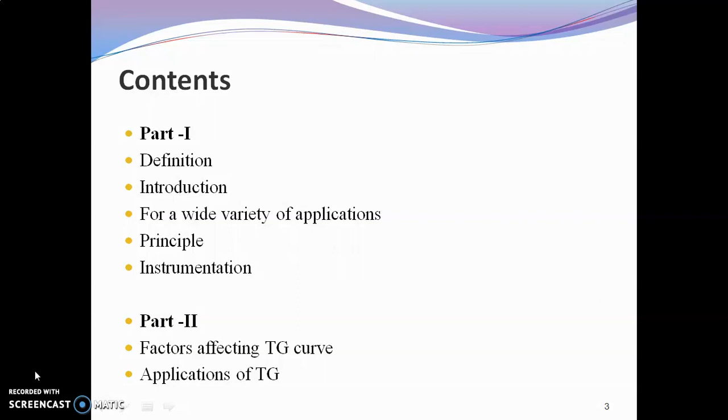Welcome you all. Today we are going to see in detail about thermogravimetric analysis. We will cover it in two parts: first part includes definition, introduction, wide variety of applications, principle and instrumentation; second part covers factors affecting the TG curve and applications.

So first of all, what is thermogravimetry? Thermogravimetry is a technique where the weight of a substance in an environment heated or cooled at a controlled rate is recorded as a function of time or temperature.

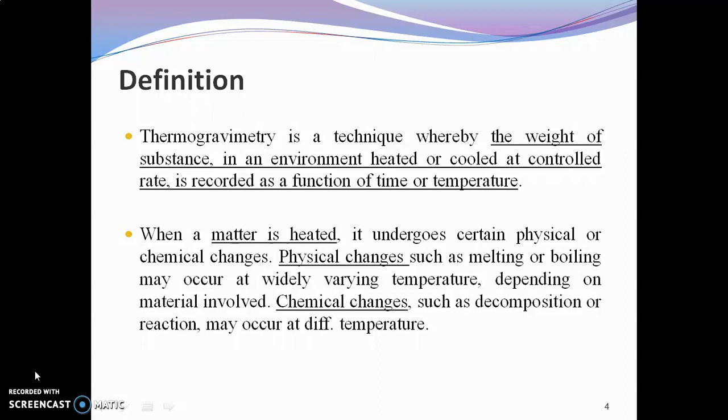When matter is heated, it undergoes certain physical or chemical changes. Physical changes such as melting or boiling may occur at a wide variety of temperatures, depending on the material involved. Chemical changes such as decomposition or reaction may occur at different temperatures.

Thermogravimetric analysis, or thermal gravimetry, is a method of thermal analysis in which changes in physical and chemical properties are monitored. Physical changes such as phase transition, vaporization, sublimation, adsorption, desorption can be monitored. Chemical changes such as desolvation, chemisorption, decomposition, oxidation or reduction are also monitored or studied.

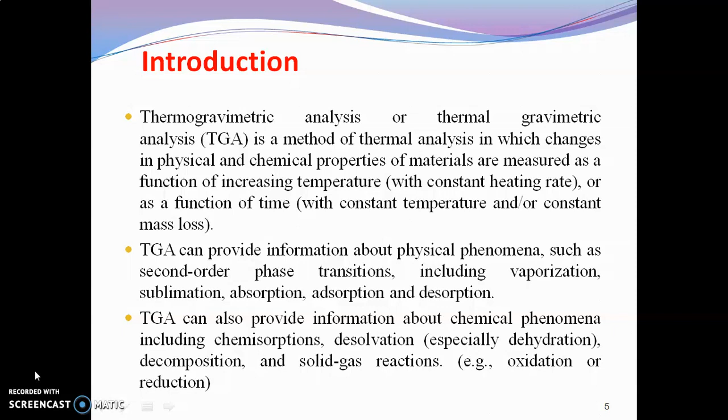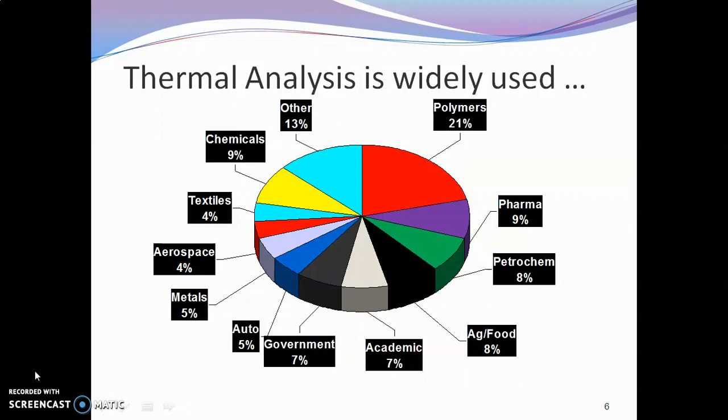Thermal analysis is widely used in many areas such as polymers, pharma industry, petrochemical industry, food industry. In academics also it is used, in government sector, aerospace, textile, chemical and other sectors. Among these areas, the largest share is present with the polymer industry.

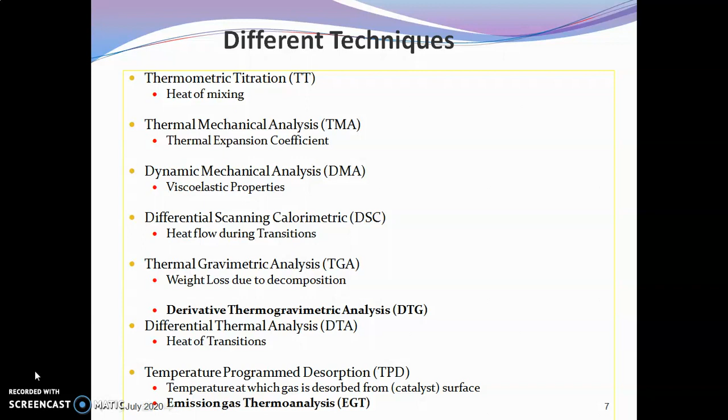Different types of thermal techniques are there. These are a few thermal analysis techniques. We are mainly focused on thermogravimetry here, and there are three types of techniques in thermogravimetry.

First is isothermal or static thermogravimetry, in which the sample weight is recorded as a function of time at constant temperature. Second is quasi-static thermogravimetry, in which the sample is heated to constant weight at a series of increasing temperatures. Third is dynamic thermogravimetry, in which the sample is heated in an environment whose temperature is changing in a predetermined manner, generally at a predetermined rate.

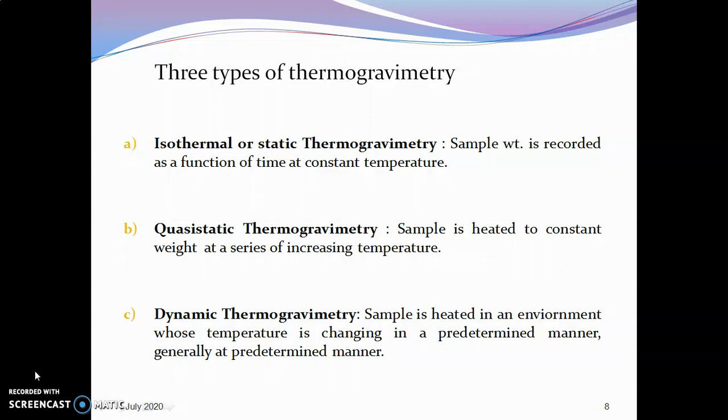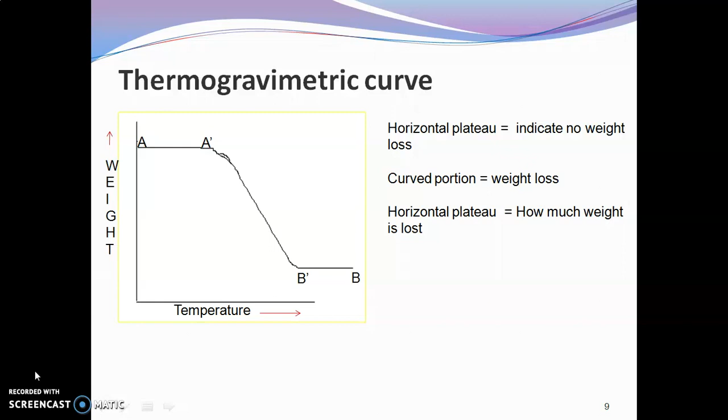Then again a horizontal plateau appears, indicating how much weight loss is obtained. The final weight loss is presented by B dash to B. This is the thermogravimetry curve.

What is the principle of thermogravimetry? In this technique, the change in sample weight is measured while the sample is heated at a constant rate under constant air pressure or nitrogen atmosphere. This technique is effective for quantitative analysis of thermal reactions accompanied by mass change, such as evaporation, decomposition, gas absorption or dehydration.

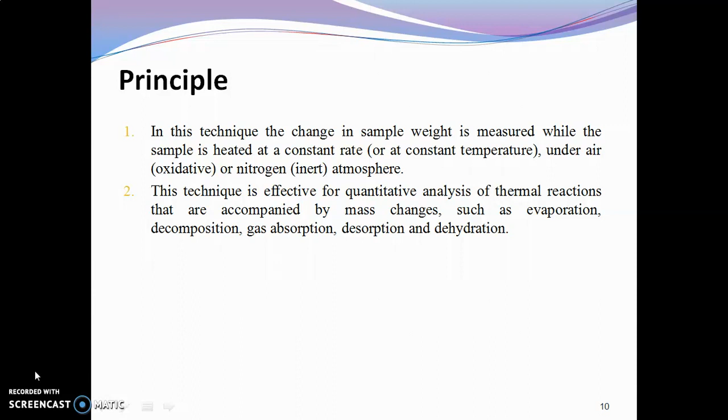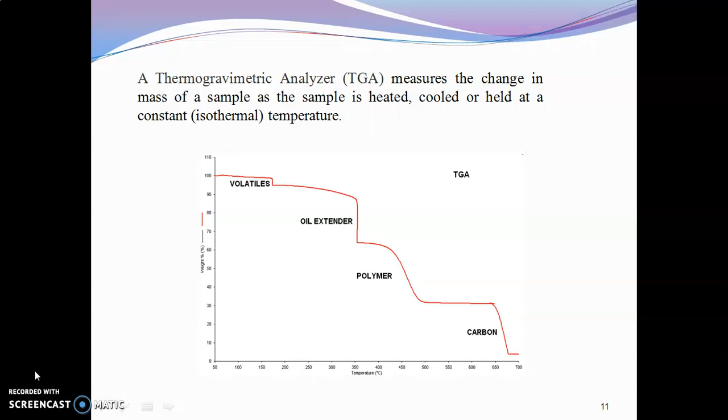The thermogravimetric analyzer measures the change in the mass of the sample as it is heated, cooled, or held at constant temperature. Now we are starting with the instrumentation.

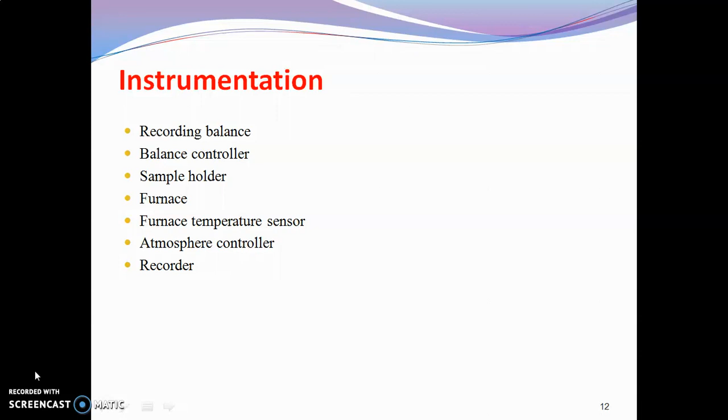So starting with the first, instrumentation. In this technique, the change in sample weight is measured while the sample is heated at a constant rate.

First we start with the balance. What should be the ideal properties of the balance? It should be accurate, sensitive, reproducible, and have the capacity to reproduce the same result. It should have an adequate range of automatic weight adjustment, a high degree of mechanical and electronic stability, give rapid response to weight change, be unaffected by vibration, and be simple to operate and versatile.

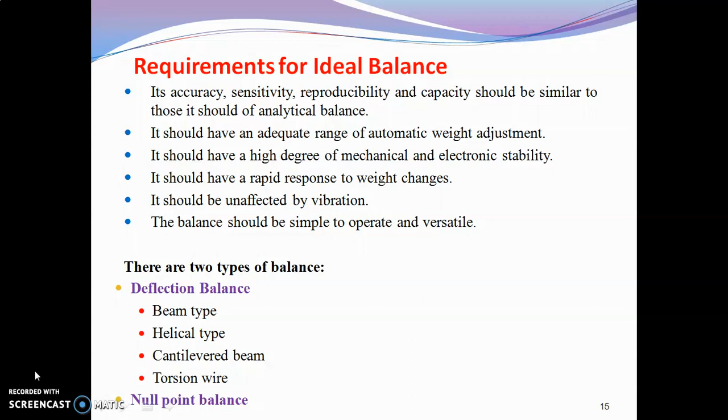Two types of balance are mainly used in thermogravimetry: deflection balance and null point balance. Deflection balance is of four types: beam type, helical type, cantilevered beam, and torsion wire. We will see each of these balances in detail.

First is the deflection type, beginning with beam type. In this balance, there occurs a conversion of beam deflection about the fulcrum into a suitably identifiable weight change curve, by either a photographic recorded trace, recorded signals generated by a suitable displacement measuring transducer, or electromechanically drawn curves.

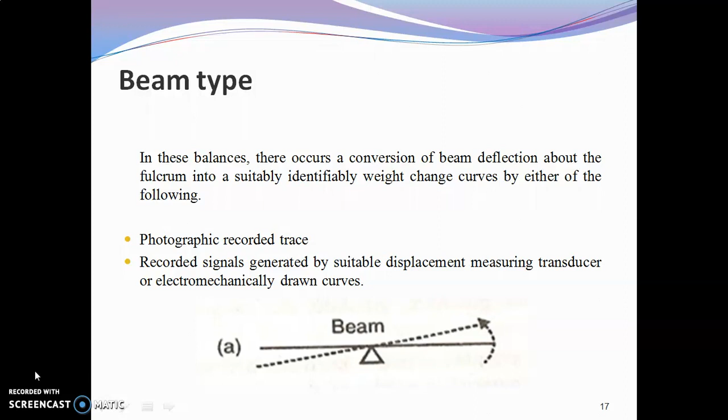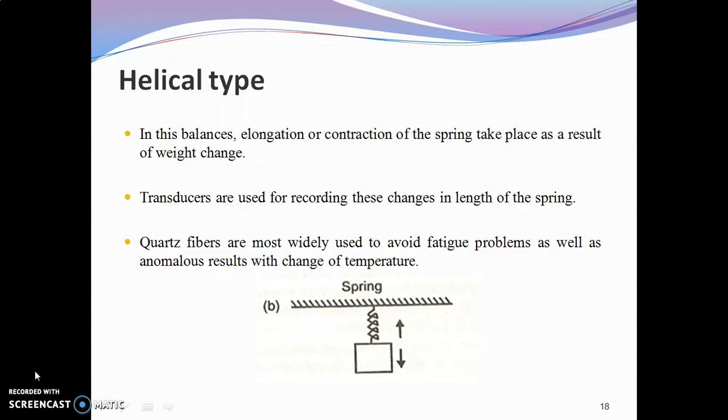Second is the helical type. In this balance, elongation or contraction of a spring takes place as a result of weight change. Transducers are used for recording the change in length of the spring. Quartz fibers are widely used to avoid fatigue problems as well as anomalous results with changes in temperature.

Next is the cantilevered beam type. Here one end of the beam is fixed, and the other end, where the sample is placed, is free to undergo deflection.

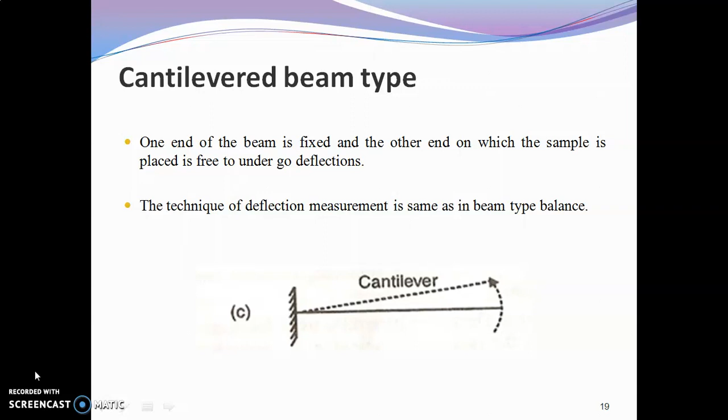This technique of deflection measurement is same as in beam type balance. Last is the torsion wire type.

The beam is attached to a taut wire which acts as a fulcrum. The wire is fixed at one or both ends so that deflection of the beam is proportional to weight change and the torsional characteristics of the wire. A metallic ribbon is also used instead of a taut wire. Detection devices are similar to the beam type.

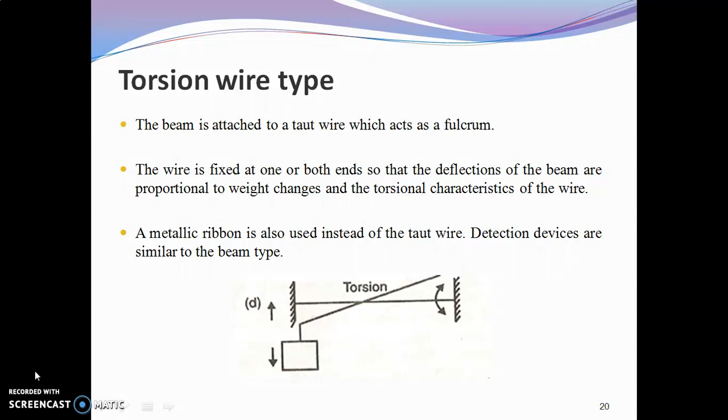So all these are the four types. Next is another one, the null point balance. The null point balance is more commonly used.

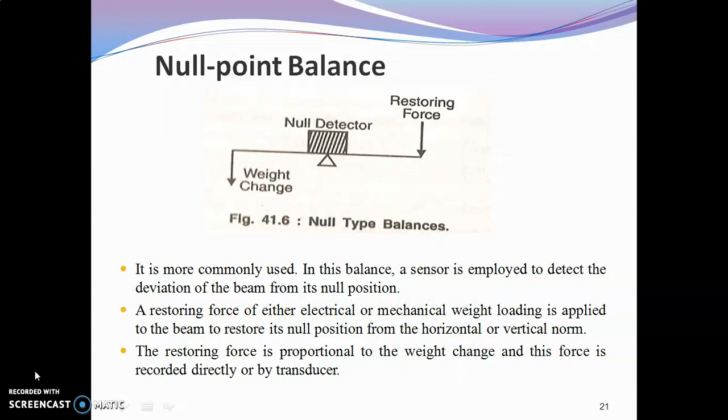In this balance, a sensor is employed to detect the deviation of the beam from its null position. A restoring force of either electrical or mechanical weight loading is applied to the beam to restore its null position from horizontal or vertical norm. The restoring force is proportional to the weight change and this force is recorded directly or by transducer.

Next is the recording balance. It is the most important component of the thermobalance. Commercially available balances can provide quantitative information about 1 mg to 100 g mass. The most common type of balance ranges from 5 to 20 mg.

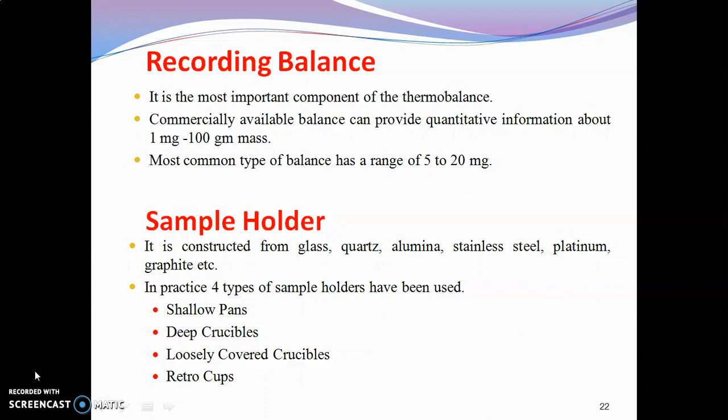Next is the sample holder. It is constructed from glass, quartz, alumina, stainless steel, platinum, graphite, etc. Practically four types of sample holders we can use: first is the shallow pan or deep crucible, loosely covered crucible, or retort cup. We will see all these sample holders in detail.

First is the shallow pan. It is suitable where it is necessary to eliminate diffusion, as the rate controlling step. For example, in case of polymers, side reactions may occur. So in that case, the sample is arranged in a thin layer so that as soon as a volatile fragment is formed, it is free to escape.

Next is the deep crucible. It is used in such cases where side reactions or partial equilibrium is to be desired. It is also used in the study of industrial scale calcination.

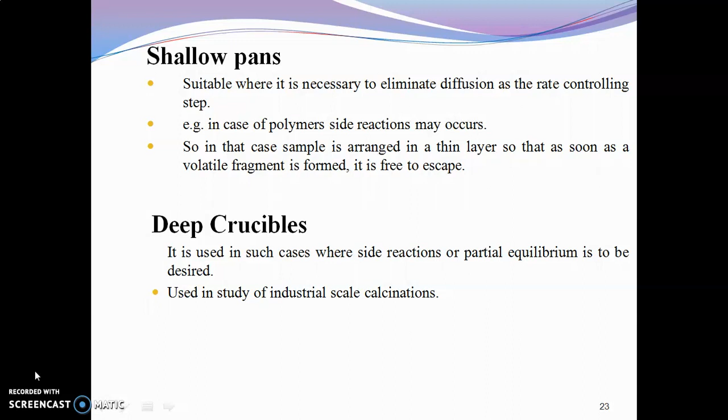Then loosely covered crucible. It is suitable when the rate of weight loss, and not the exact temperature, is taken into consideration, as in case of self-generated atmosphere studies.

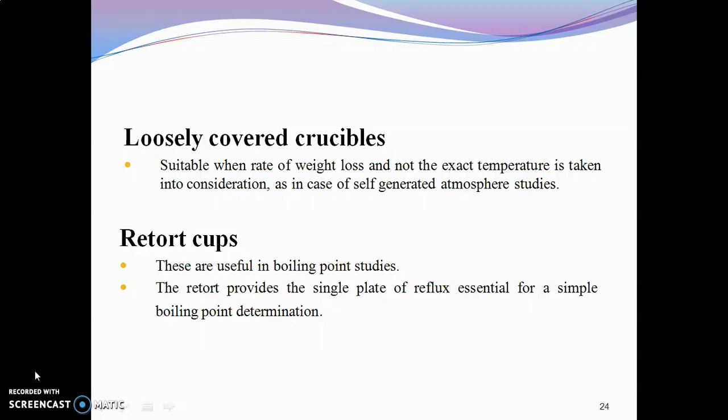Next is the retort cup. These are useful in boiling point studies. The retort provides the single plate of reflux essential for simple boiling point determination.

Then furnace. The choice of furnace, heating element, and type of furnace depends on the temperature range being studied. Various types of material we can choose according to the temperature requirement. Suppose we are using nichrome wire, so we can achieve a temperature up to 1100.

If we are using platinum or an alloy of platinum-rhodium, we can achieve temperatures from 1100 to 1500 degrees Celsius. Or if we require a temperature more than 1750, we can use tungsten or molybdenum as material. The size of furnace is very important. A high mass furnace is much better than a low mass furnace because it becomes easier to obtain a large uniform hot zone in the high mass furnace.

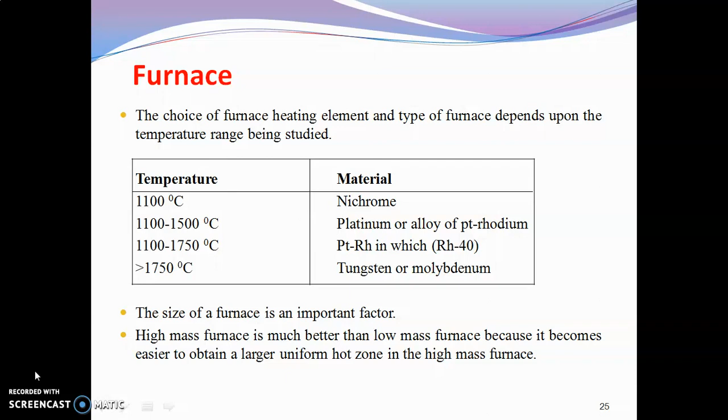Purging system: here we have to purge or remove the oxygen or whatever atmosphere is present, and provide an inert atmosphere. So it is very important. Generally nitrogen or argon gas is used for purging the furnace. We can prevent oxidation of our sample by using nitrogen or argon gas.

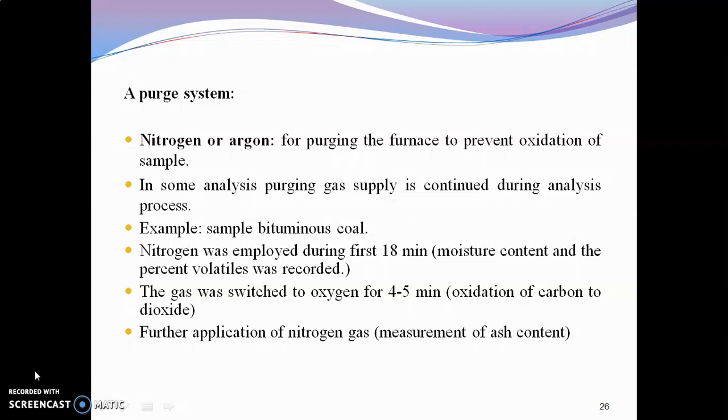In some analyses, the purging gas supply is continued during the analysis process. For example, with a sample of bituminous coal, nitrogen was employed during the first 18 minutes, and the moisture content and percent volatile are recorded. Then the gas was switched to oxygen for 4 to 5 minutes, and further application of nitrogen gas is possible. Finally, the measurement of ash content can be done, so the purging system plays a very major role in it.

Then recorder. Two types of recorders are there: time-based potentiometric strip chart recorder and XY recorder. In some instruments, light beam galvanometer, photographic paper recorder, or one recorder with two or more pens are used. One can check the heating rate of the furnace for linearity. In the XY recorder, we get curves plotting weight against temperature. Percentage mass change versus time or temperature is the suitable mode of recording data for thermogravimetry.

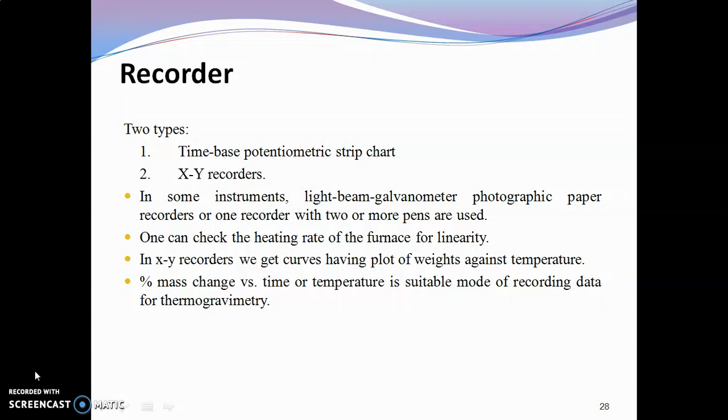So here we have finished part 1 of thermogravimetric analysis. In part 2, we are going to see the various applications as well as factors affecting thermogravimetric analysis. Thank you so much.